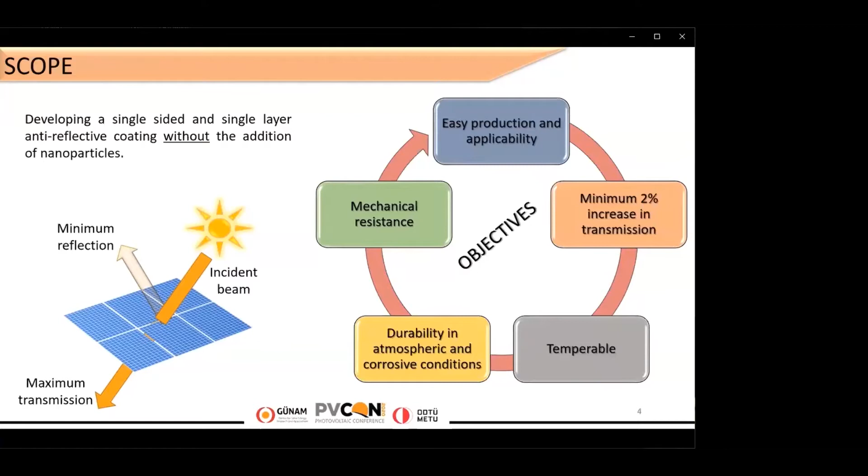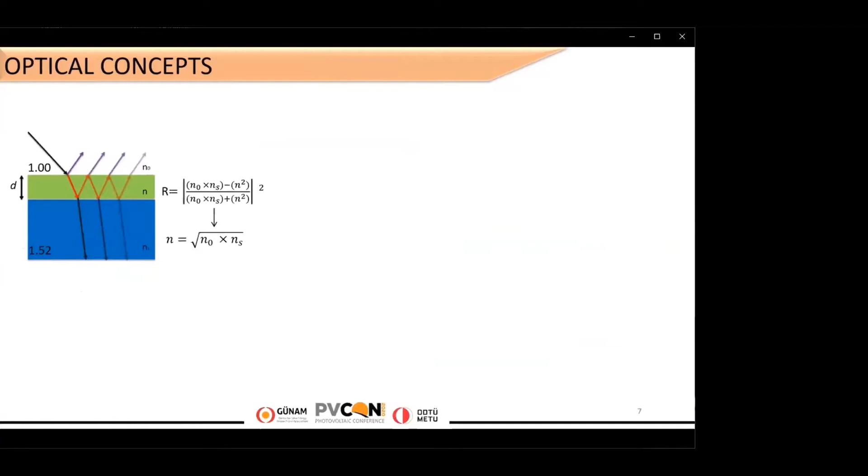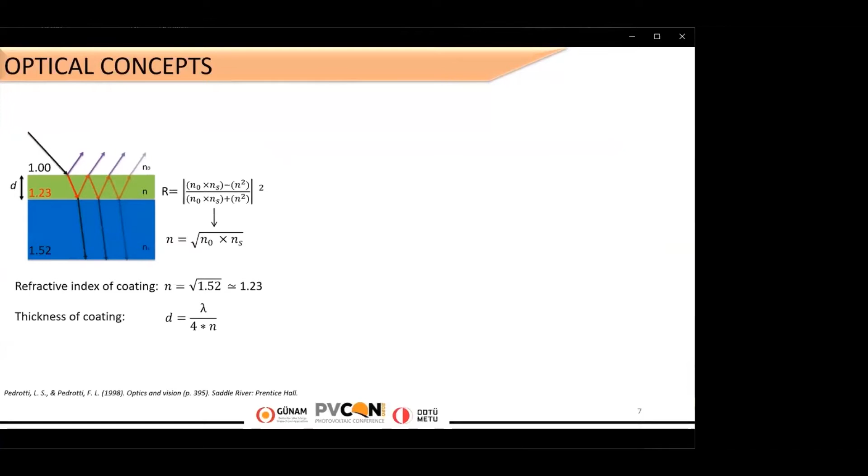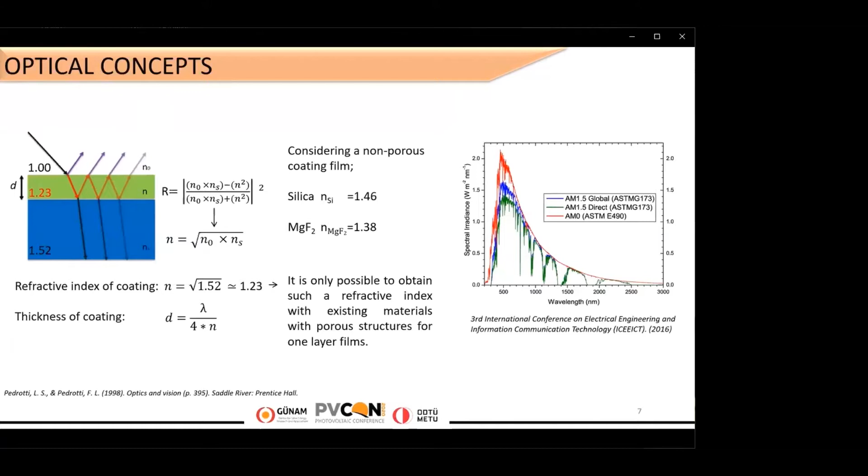Among the existing materials, there is no coating material with a refractive index of 1.23, so we have to obtain a porous film to decrease refractive index. Pore structures can be open or closed types. You can see on the table that there are advantages and some disadvantages compared to each other. We try to eliminate the low strength of the open structure by chemical modification. You can see a schematic view of molecules on the right corner of the page.

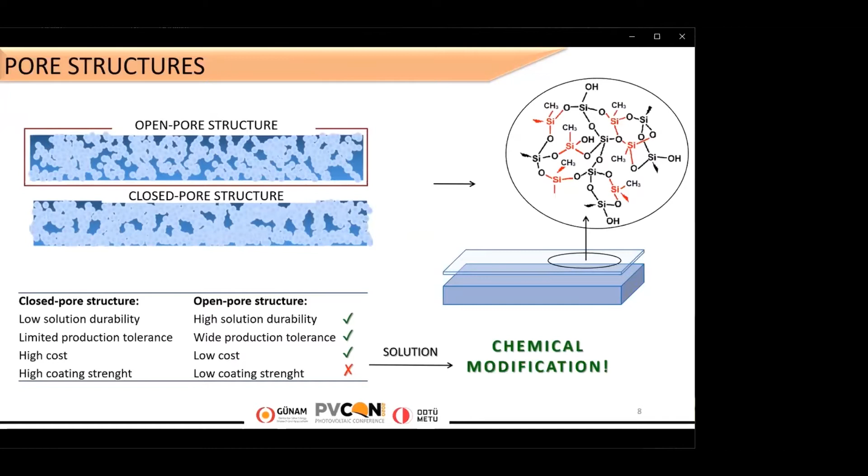There are two different types of silane molecules in the figure. Red ones have one organic group. During the process, these groups will decompose and small gaps will remain behind. This is the system that we studied.

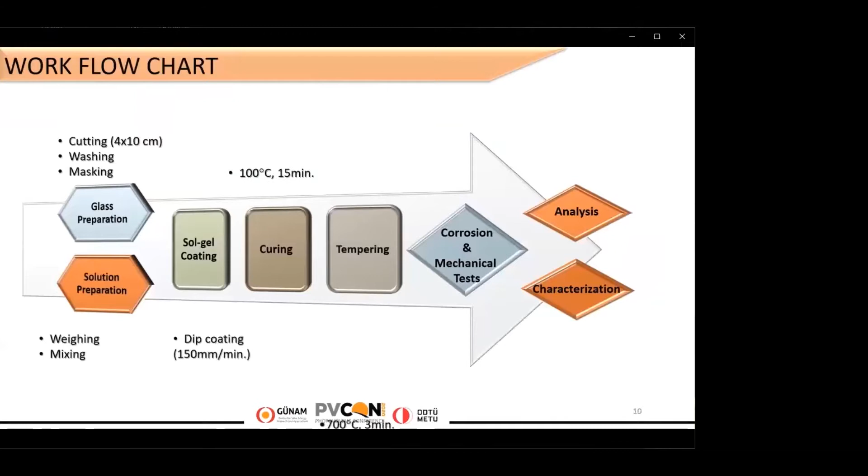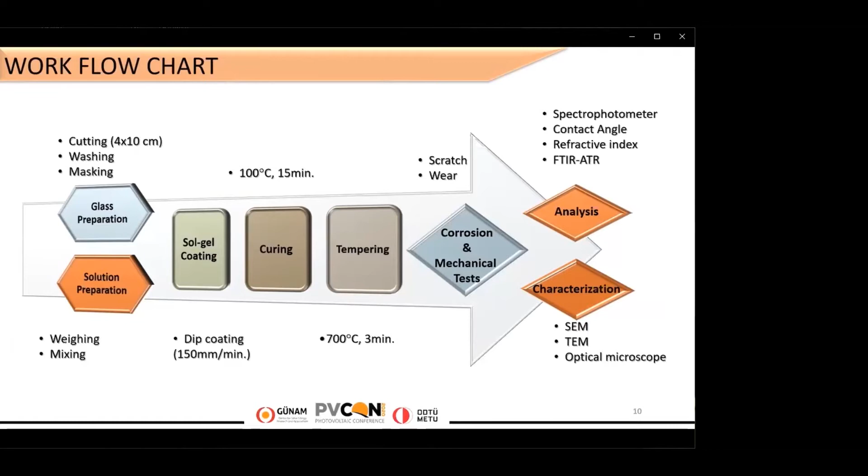Let's continue with experimental studies. First, glass substrates and solutions were prepared. Since we used the dip coating method, one side of the glasses was masked. After coating, coated glasses were cured at 100 degrees Celsius and tempered at 700 degrees Celsius for 3 minutes. In order to obtain optimum conditions, we studied all parameters such as withdrawal rate, temperature, and time, etc. Also, we did many tests, analyses, and used characterization techniques that you can see at the end of the flow chart to investigate details.

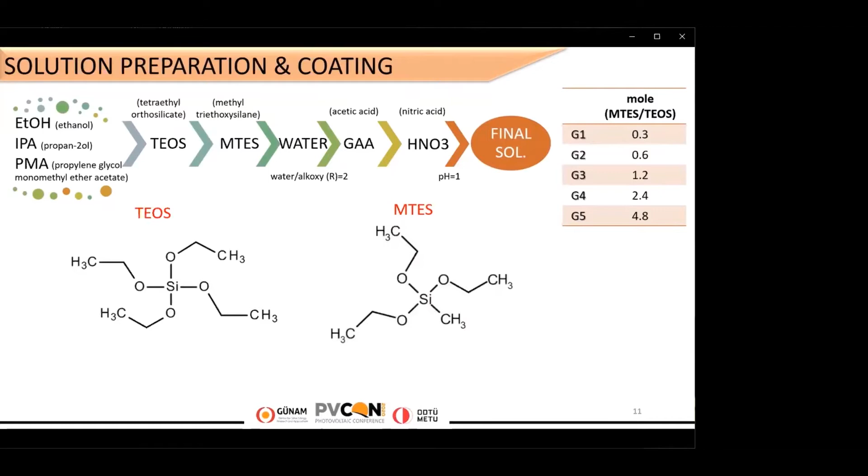Here is the solution preparation and coating steps. We used as a solvent an ethanol, propanol, and PMA mixture, and as a precursor, we used dual alkoxysilanes, which are tetraethyl orthosilicate and methyltriethoxysilane, that you can see in the figures. Finally, we added acetic acid as an organic acid and nitric acid as an inorganic acid together as catalysts. We determined the exact ratios of all ingredients by experimenting, except silanes. We have determined the silane groups as variables, and you can see 5 different ratios coded as G in the table. We use the dip coating method, as I said before, and here are the steps of this method.

The substrate is immersed into the solution. The substrate which has been dipped into the solution starts to be pulled up. The withdrawal is carried out at a constant rate. The film is deposited on the substrate while it's pulled up. The solvent is evaporated from the deposited liquid film, resulting in the coating.

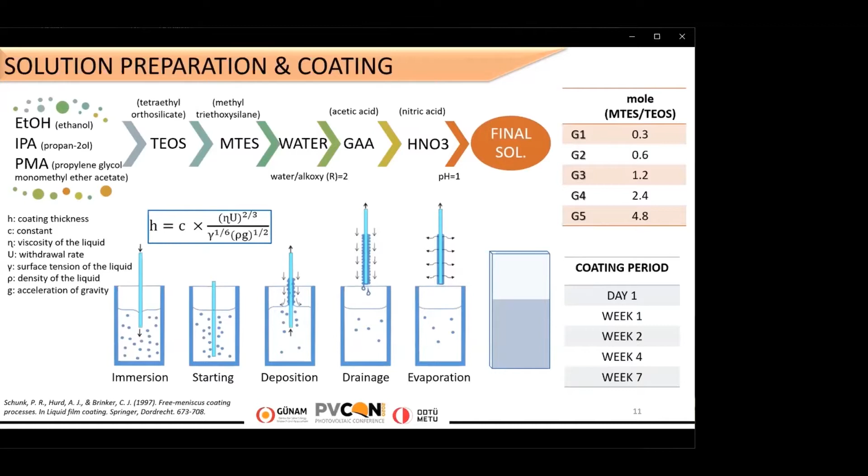The most important parameter is withdrawal speed, which you can see in the equation. The withdrawal speed determines the thickness of the deposited film. A higher speed produces a thicker film. As I mentioned before, our withdrawal rate was 150 millimeters per minute. With this method, we coated our samples with the periods you see in the table and examined the effects of the waiting time of the solution. Let's continue with results.

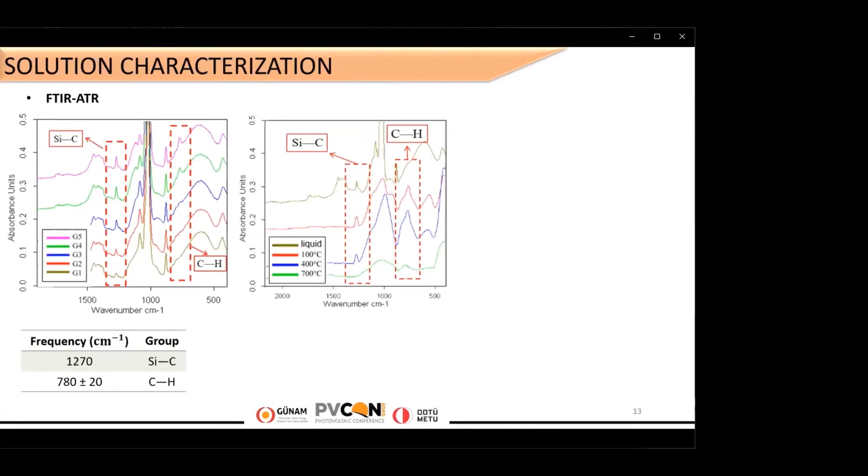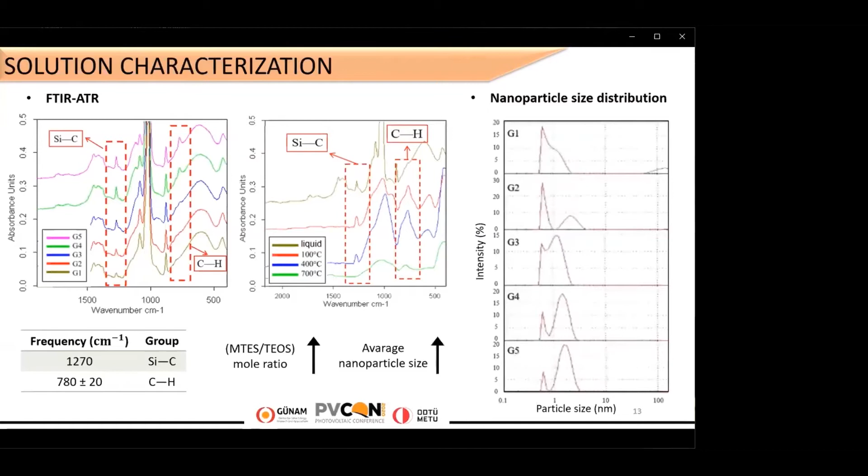There are two FTIR graphs here. The left one, which includes all versions, shows us the peaks belonging to organic groups are increasing with increasing MTES ratio, and the other one, which belongs to the G3 version of solutions after several temperatures, shows that organic groups moved away from solutions with increasing temperature. But even after 700 degrees, it is thought that there are still some organic groups left, as seen on the green line. Also, there are nanoparticle size distributions for all versions. We can say that the average nanoparticle size increases with increasing MTES ratio.

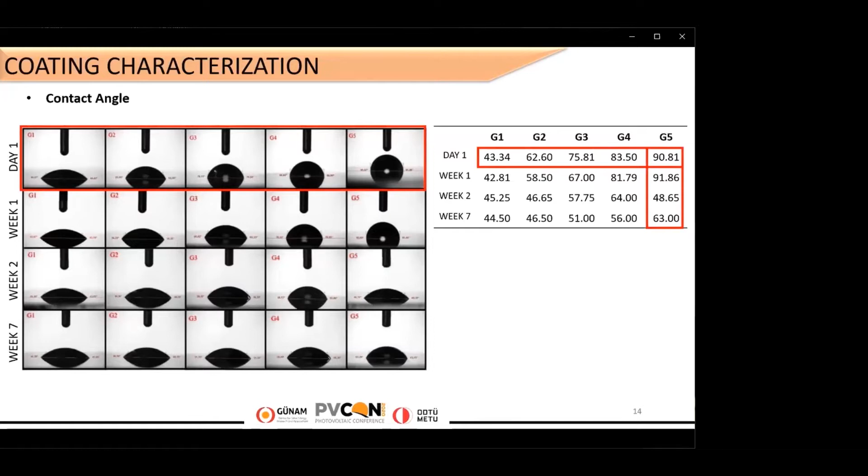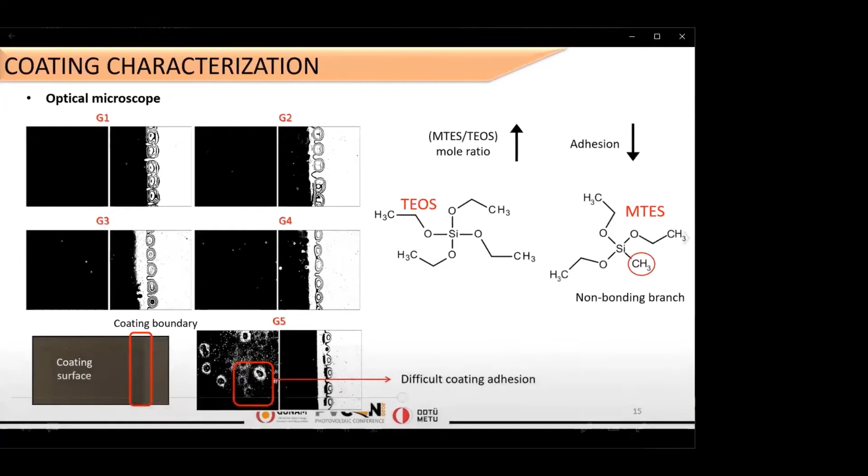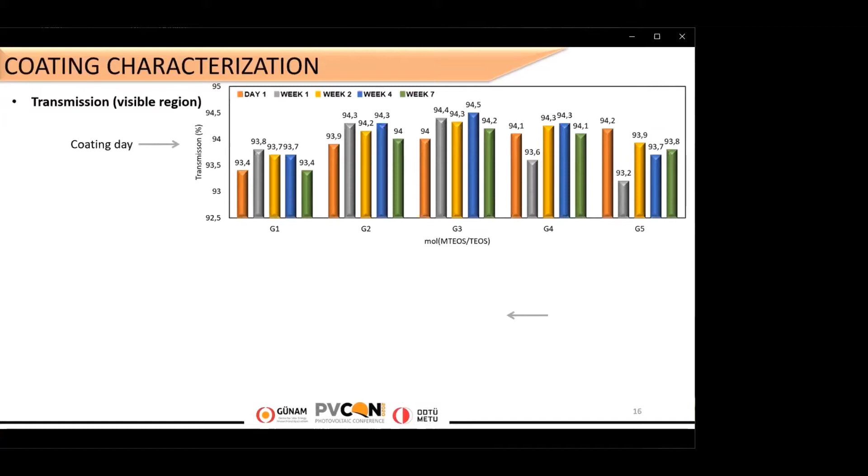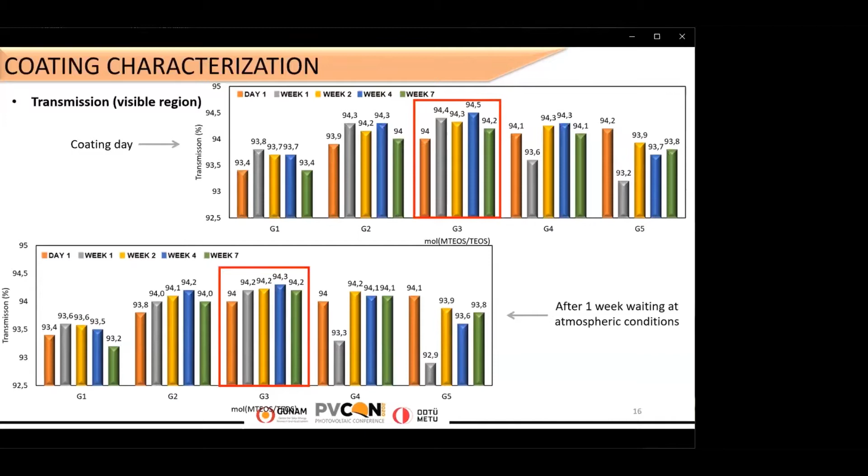In this part, there are other transmission and reflection measurements at different wavelengths. And again, the G3 sample has the best values in both transmission and reflection. The G3 coating provided 1.9% in AM 1.5 transmission scale, also provided 2.26% in light and 1.73% in solar reflection.

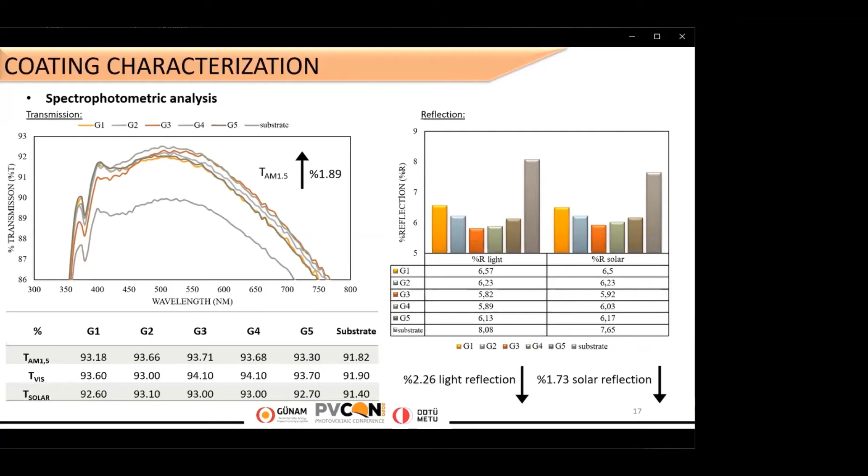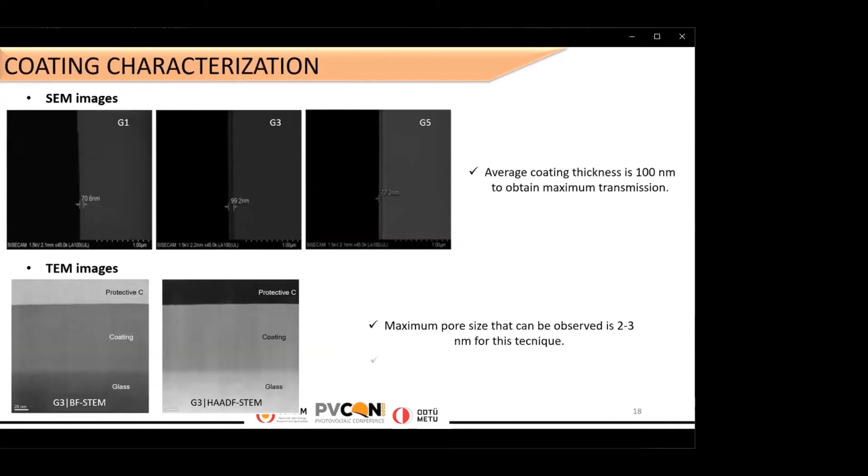Here are the cross-section SEM images of G1, G3, and G5 samples and TEM images of G3 samples. We have obtained the maximum transmission value with the G3 sample, and its coating thickness is about 100 nanometers. It's also shown in TEM images that G3 samples have no porosity at the nanometer scale.

You see a device here. The thickness and refractive index of coatings can be measured by this device. Actually, the device uses some equations to calculate this, with some approximate limits entered into its program. Then it generates data in reflection mode with the help of a probe and makes calculations by matching with the entered values. It seems that the values closest to 100 nanometers belong to the G3 sample, and the minimum refractive index value obtained is 1.40.

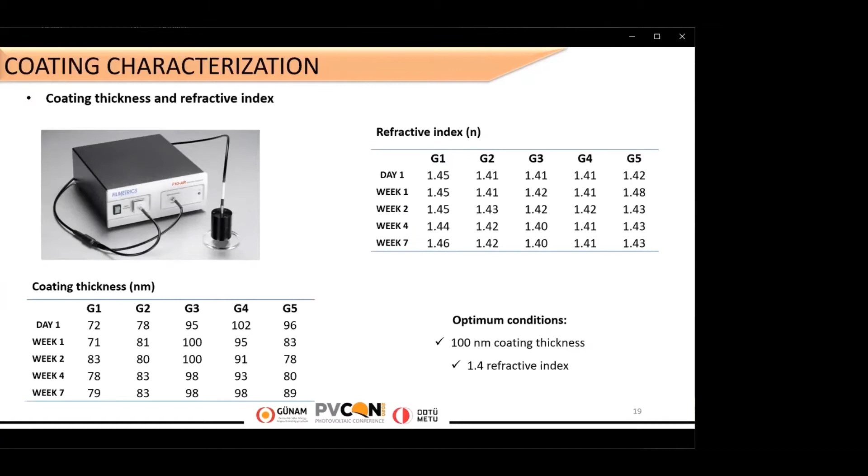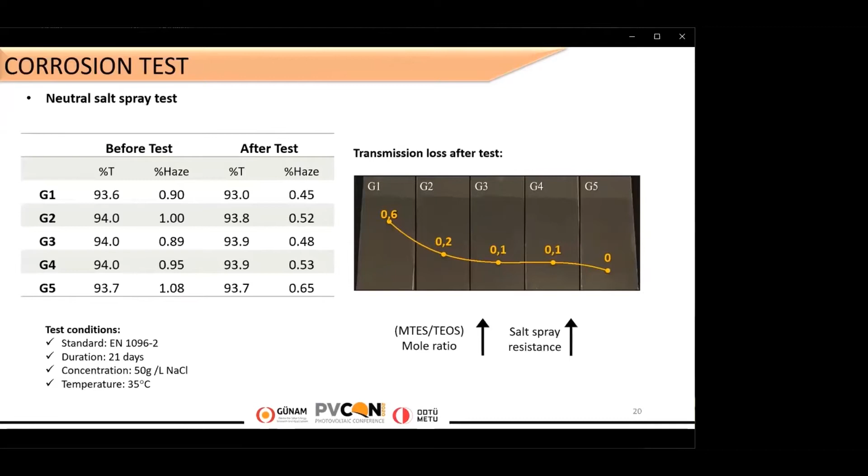Here are the results of the neutral salt spray test, which is one of the most important corrosion tests for coated glasses. When we compared all samples, it seems that the transmission loss, in other words, corrosion resistance, increases with increasing MTES ratio. We also did a linear wear test. The values in the table are a little bit different because the samples were masked for this test. The difference between measurements before and after the test is used to compare. It seems that there is no remarkable difference for all versions.

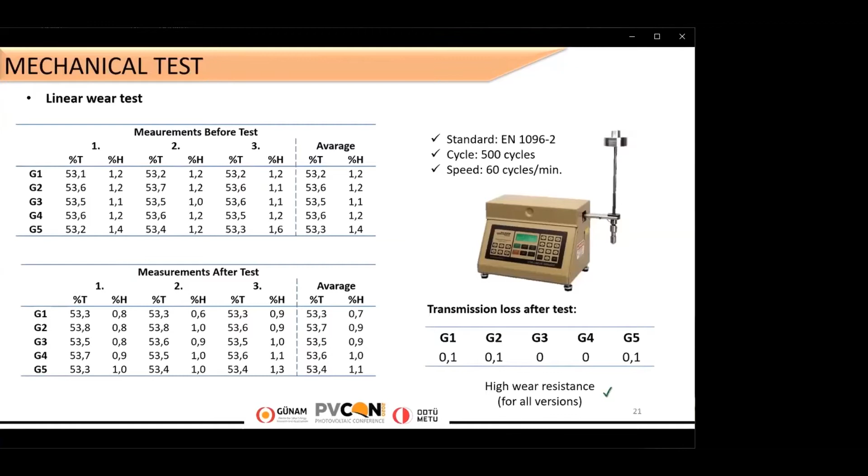Here's another mechanical test that is called the Newton scratch hardness test. You can see the scratches on the surface of coatings after the test in the figures. The columns represent versions of solutions and rows represent different loads. There don't seem to be any scratches in the G5 sample after 3 Newton loads. And when we look at the uncoated substrates after 20 Newton load, we can see scratches of glass as a black line. This type of scratch only appears in the G1 sample, not for the others. So we can say that the scratch resistance increases with increasing MTES ratio.

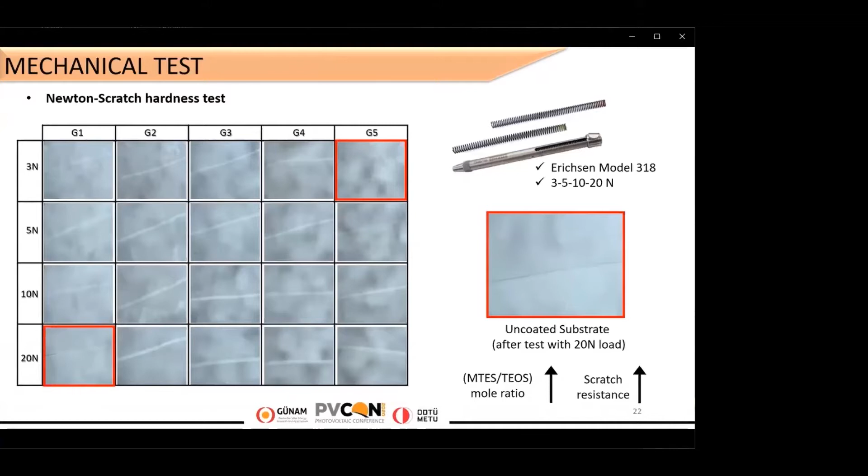We can summarize all results as follows. In this study, we obtained hybrid structures by using dual alkoxysilanes and different types of acids, and also we reduced the corrosive effects of solutions by using organic acids. It's important for mass production, such as roll coating.

Comparable anti-reflective coatings were obtained, and we saw that the MTES component provides coating thickness, tolerance, and elasticity, but its excessive increase affects coating adhesion and solution stability negatively. It's proved that the optimum MTES/TEOS mole ratio was 1.2 among all versions. Successful results were achieved from corrosion and mechanical tests for all versions.

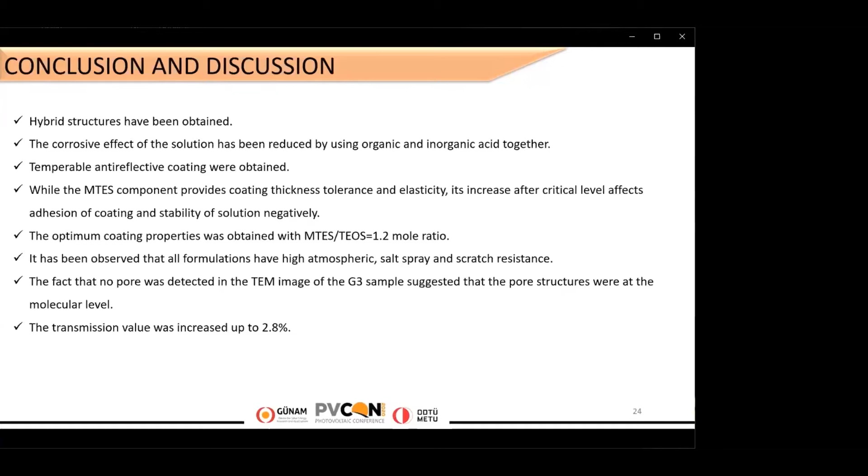There's one question from the audience that I want to direct to you. It says, how does the MTES ratio affect coating elasticity? Is it directly proportional? The MTES compounds include methyl groups, and most of these organic compounds decompose from the film structure at high temperatures. And in this way, small gaps remain behind in the structure.

These gaps provide the possibility of movement and flexibility of molecules during the heat treatments, and other inorganic branches are connected to each other and the glass substrate. On the other hand, if the MTES ratio is increased too much, the bonding branching numbers decrease, so the adhesion of the coating is affected badly. Okay, I think that was quite clear.

I have a small question. So it seems like these coatings that you have been developing have a positive effect on many parameters and performed quite well in many of your tests. But how about the cost effectiveness of this coating process? I mean, does that contribute too much cost to the overall preparation of the glass for solar cells?

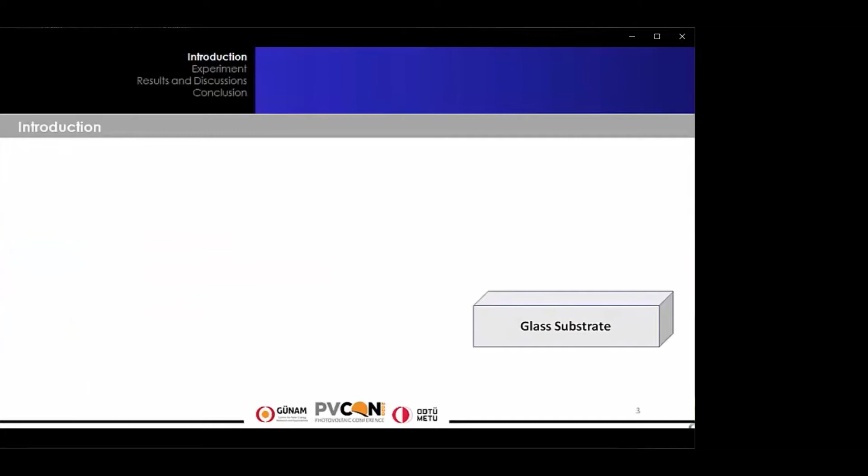In a photovoltaic device, the solar cell is composed of 4 main layers in addition to the substrate, which is generally made of glass. There is the back contact, which is an ohmic contact. In most cases, it's molybdenum. The second layer is the absorber layer with p-type conduction. The third is the buffer layer. And the last layer is the transparent conductive oxide layer in ITO or aluminum-doped ZnO.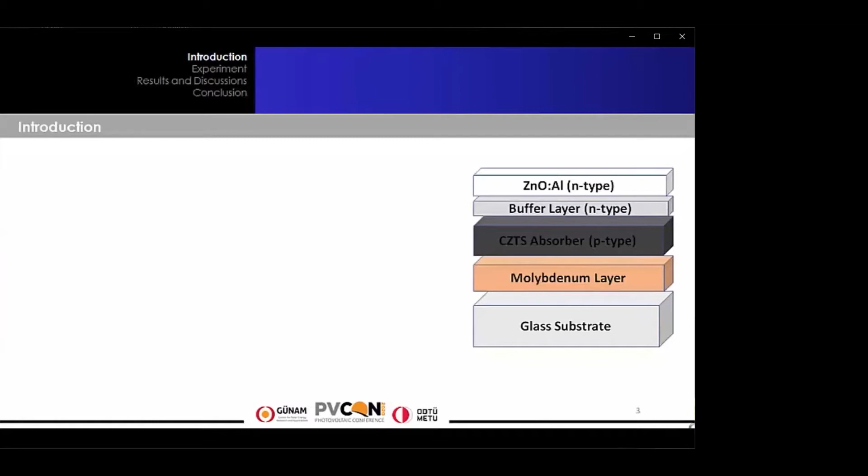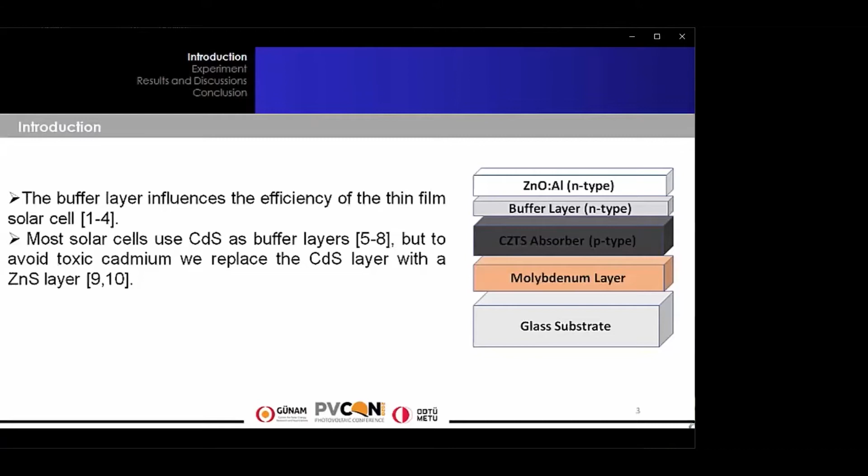In this presentation, we focus on the buffer layer, which is located between the absorber layer and the transparent conductive oxide layer. This layer considerably influences the performance of the thin film solar cell. Generally, most solar cells use CdS as buffer layers, but to avoid toxic cadmium, we replace the CdS layer with a ZnS layer. In this work, we were interested in the elaboration of zinc sulfide films and studied the effect of the solvent and temperature on the optical, morphological, and structural properties of our layers, which have been prepared by the mist CVD technique.

The spray-assisted CVD technique is a technique developed by Japanese researchers. The technique operates at atmospheric pressure and at room temperature. The figure in front of you shows the USCVD system.

In the USCVD system, there are three principal parts. The first is the gas unit. It's composed of a gas cylinder and a flow unit with two flow meters, one for carrier gas and the other for dilution gas. The second part of the system is the mist unit.

It consists of a hollow solution cylinder covered by a thin plastic film on the solution side and a small tank of water with two ultrasonic generators. The third part is the reaction unit. It's composed of a heater and reactor chamber.

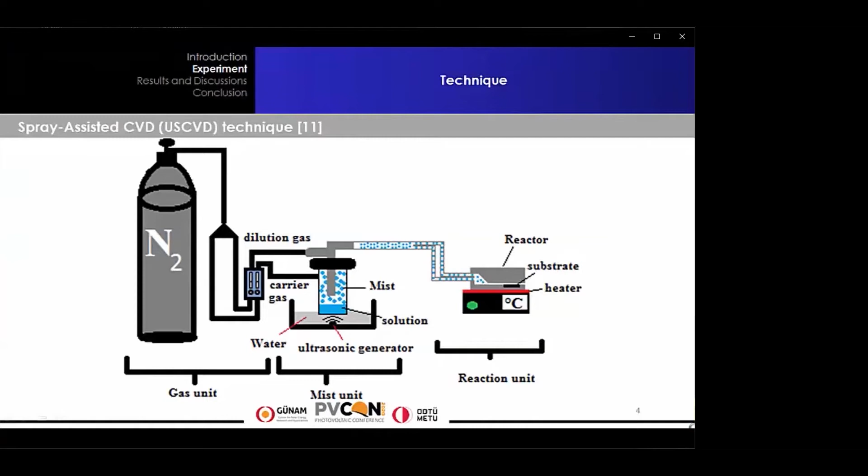This technique has many advantages, such as simplicity, low cost, no vacuum required at any stage, security and easy operation, the simple system configuration with easy maintenance, good adhesion between the film and the substrate, and the quality of the film.

First of all, the substrate is cleaned according to these steps. Wash 10 minutes in acetone bath. Wash 10 minutes in methanol bath. Rinse 10 minutes in distilled water bath. Dry the substrate using an oven at 110 degrees Celsius.

Then, ZnS solutions were prepared using zinc chloride as the zinc source and urea as the sulfur source. The required quantity of precursor was dissolved using distilled water or methanol or mixed distilled water and methanol in a glass beaker. After, our substrates are placed on the heating plates in the reactor at the desired temperature.

Then we initiate the USCVD parameters and we start the operation which is explained in the previous slide. The deposition time was 20 minutes. The used parameters are summarized in the table in front of you.

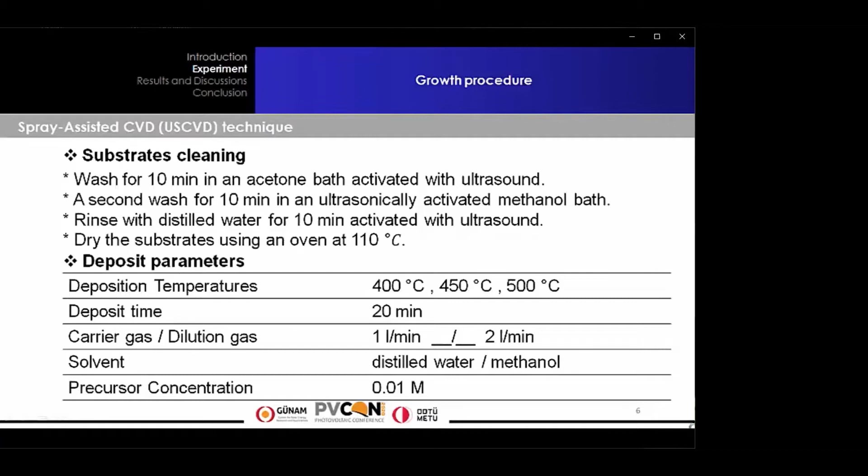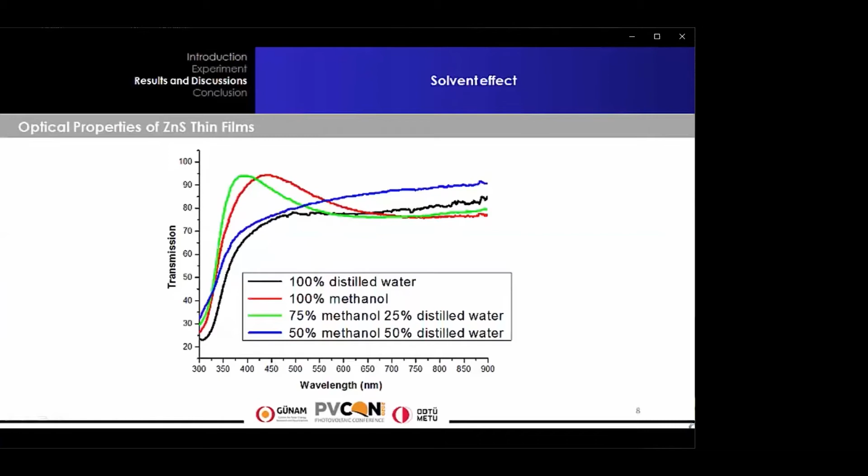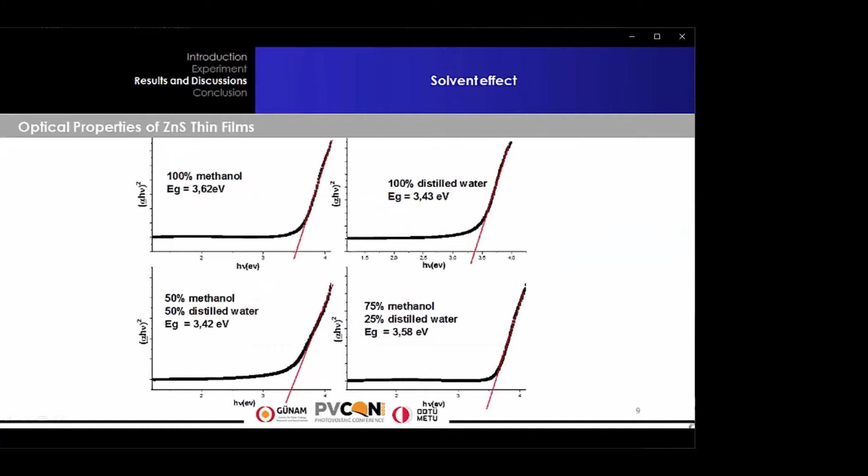From the transmission spectra, we have calculated the optical gap using the Tauc formula, and we can observe that the gap for all films varies in the range of 3.43 to 3.62 electronvolts. These values are close to the values reported in the literature.

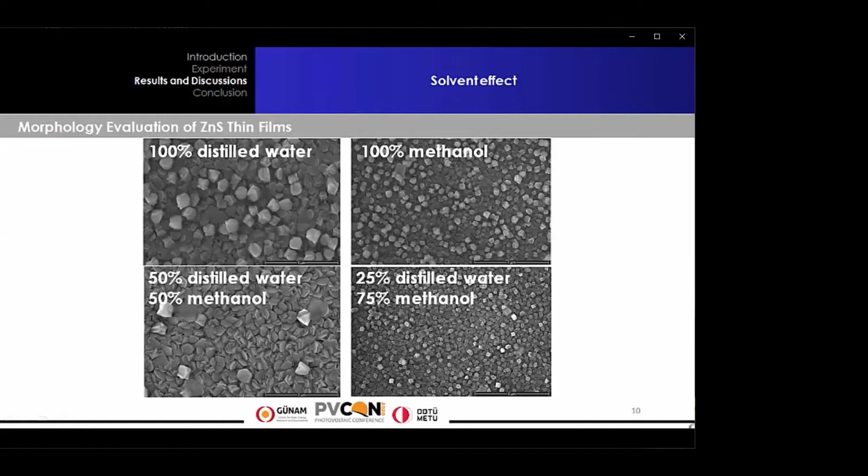These figures represent the morphology of ZnS layers deposited by USCVD with different percentages of the solvents. It is observed that all the films exhibit better adhesion to the substrate, very dense and very compact particles covering the entire surface of the substrate.

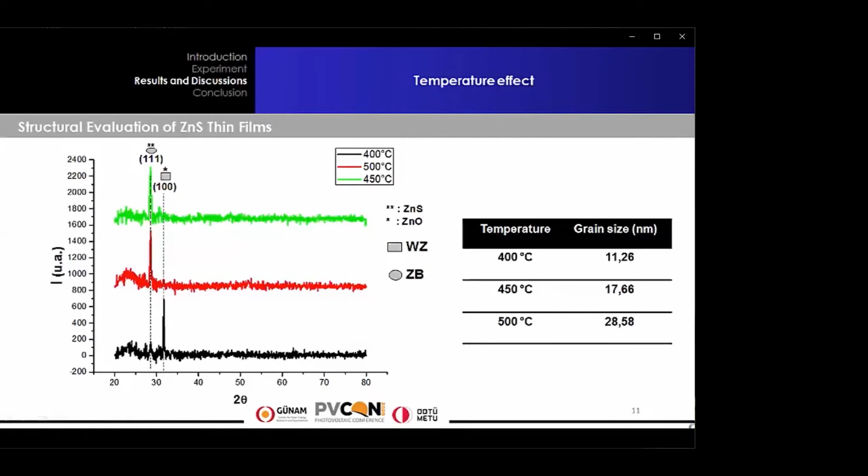These results indicate that all ZnS samples have a zinc blende structure and that the sample grown at 400 degrees Celsius also contains wurtzite ZnO structure. From the transmission spectra, we notice that the transparency of the film increases with the increase in the temperature of the substrate, and that the maximum of the transmittance is located in the visible range.

We have calculated the optical gap from the transmission spectra using the Tauc formula, and we observe that the gap of all films varies in the range of 3.57 to 3.65 electronvolts.

The figure in front of you represents the morphology of the layers of ZnS deposited by USCVD with different deposition temperatures. We can see that all the films exhibit better adhesion to the substrate, very dense and very compact particles covering the entire surface of the substrate.

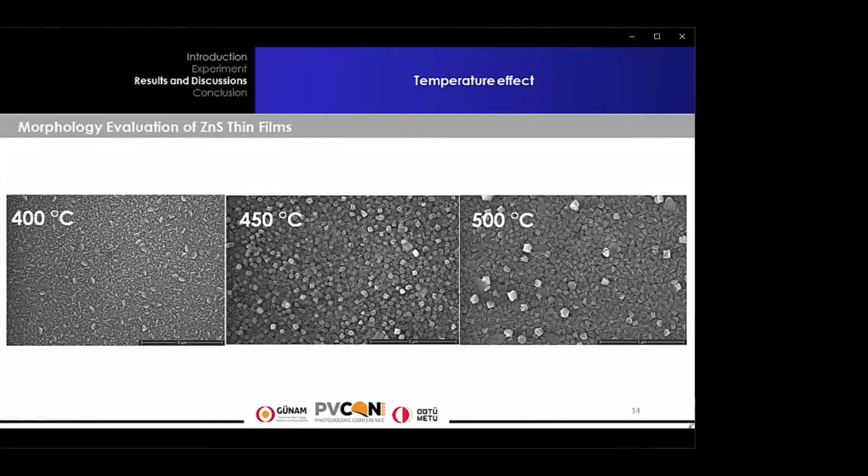The same images show the presence of a mixture of grains of hexagonal and cubic shape for the temperature 400 degrees Celsius, with a predominance of cubic grains toward the high temperature. These results confirm the analysis obtained by X-ray diffraction measurements.

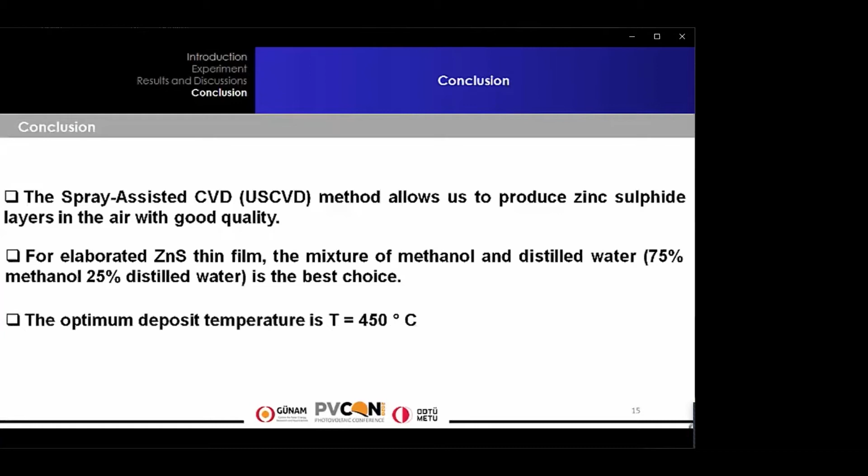Therefore, from the present study we can conclude that the spray-assisted CVD method allows us to produce zinc sulfide layers in the air with good quality. For elaborated ZnS thin film, the mixture of methanol and distilled water, 75% methanol, 25% distilled water, is the best choice. The optimum deposit temperature is 450 degrees Celsius.

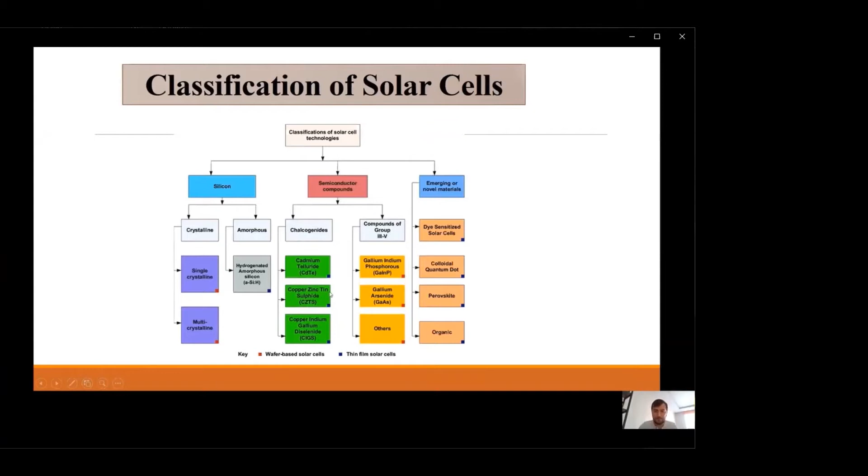What are the properties of the CZTS? First of all, we use the CZTS as an absorber layer in the CZTS-based solar cell. It has p-type conductivity, and we use it to absorb most of the photons. It has a suitable band gap. As you can see in this figure, 1.4 is around here, and the theoretical limit is about 30%. But for this kind of solar cells, the reported conversion efficiency is around 12.6%. So there are so many things to do to increase the reported conversion efficiency.

It has a high absorption coefficient. It means that you can absorb most of the light in a very thin layer. It has a low cost.

It has low cost and earth-abundant materials. As you can see, there's copper here, zinc here, tin here. It has a high crustal abundance, and the price is low compared with others like indium and gallium. So due to the low cost and earth-abundant materials, it is preferable in thin film photovoltaic applications.

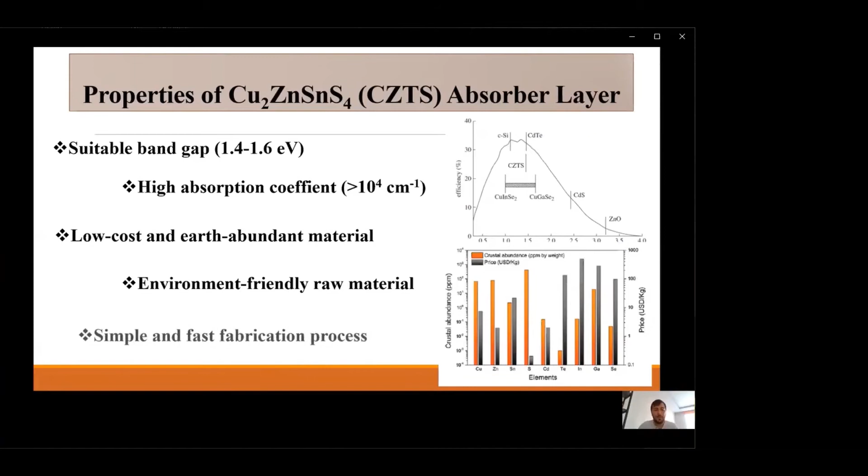It has environmentally friendly raw materials, so it can be used very widely in thin film solar cells due to these properties, and it also has a simple and fast fabrication process.

So in this study, we propose two new stacks, first proposed by our research group. The first one is copper tin zinc copper. First of all, we deposit copper and tin, and then we turn the sputtering chamber without breaking the vacuum, and obtain a copper tin alloy in order to prevent tin loss from the samples, because tin has a high vapor pressure. So to prevent the tin loss, we alloy it with copper, and then zinc is deposited on it. Finally, the remaining part of the copper is deposited on zinc.

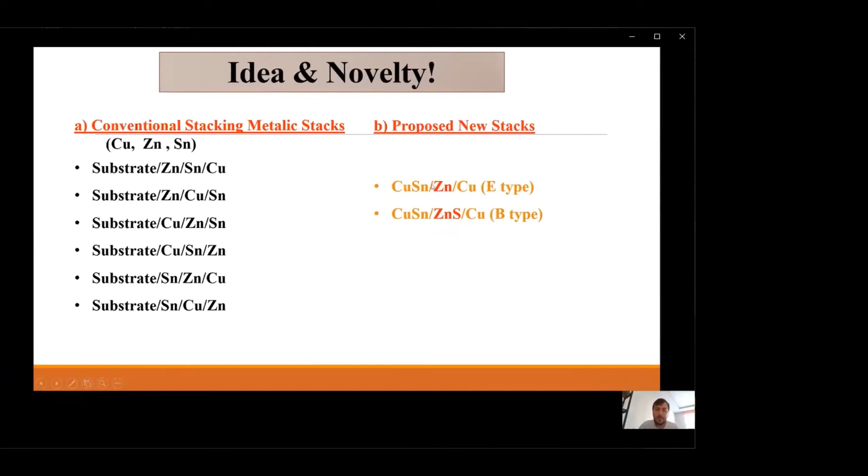We named this stack E-type because we used elemental zinc here, and in the next one we use a binary layer of zinc, so we used B-type. We denoted these samples as B-type because we used a binary target here. So in this study, we investigate the effect of the reaction temperature and stacking order of these films. We use various sulfurization temperatures and compare both stacking orders to find the best one.

What were the experimental details? We sputtered the metallic films layer by layer with a PVD system in our laboratory to form these two stacking orders, copper tin zinc copper and copper tin zinc sulfide copper. We annealed them in the RTP system at 500, 525, 550, 575 for 1 minute, because the RTP gives a nice facility with a heating rate of 3 Celsius per second in an argon and hydrogen atmosphere.

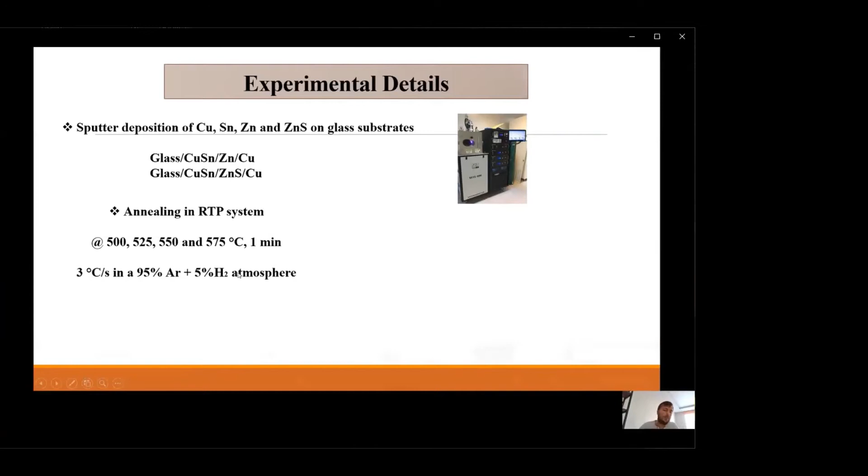And then finally, we analyze these samples with a profilometer to measure the thickness of the films, EDX to measure the chemical composition of the films, SEM, scanning electron microscopy, to investigate morphology of the films, XRD to investigate crystalline structure, and Raman also to investigate structural properties of the films. And finally, room temperature photoluminescence spectroscopy to investigate optical properties of these films.

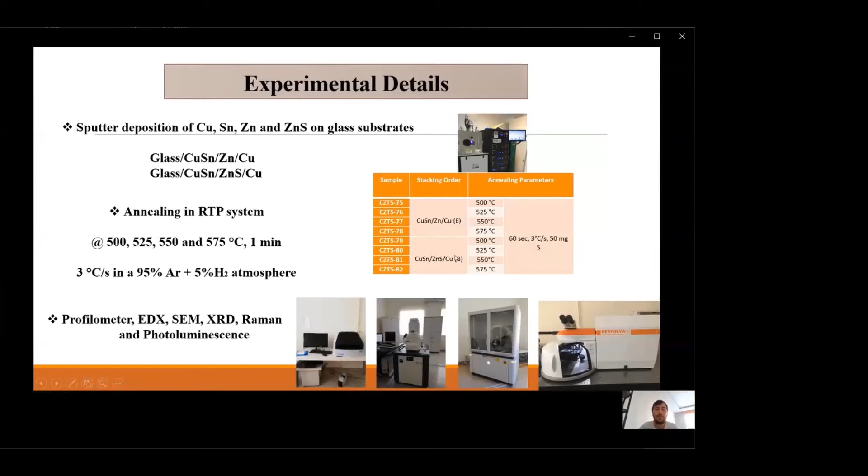As I said before, we use two stacking orders, E-type and B-type samples, and we use 4 different temperatures for each sample. So we numbered the samples like CZTS 75, 76, 77, 78 according to their sulfurization temperature for E-type, and CZTS 79, 80, 81, 82 for B-type samples according to their sulfurization temperatures.

In our EDX measurement, we target to obtain copper-poor and zinc-rich samples, because in CZTS thin films, the copper-poor and zinc-rich composition is a desired property, since copper vacancies and copper-zinc antisite defects strengthen the P-type conductivity of this compound. So this is our target. This is the chemical composition of the prepared CZTS samples, E-type on the left side and B-type on the right side.

As you can see, for the E-type samples, all of the samples have a copper-poor and zinc-rich composition. But at 500 Celsius, the copper ratio is less than the others, and the sulfur ratio is low compared to other samples. So it can be concluded that sulfurization for 1 minute at this temperature is maybe insufficient to obtain fully completed CZTS samples. So for E-type films, maybe 500 Celsius is not sufficient.

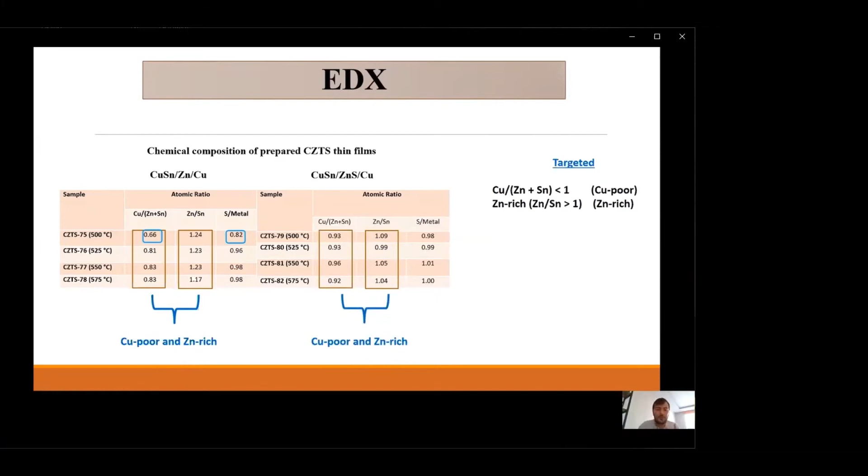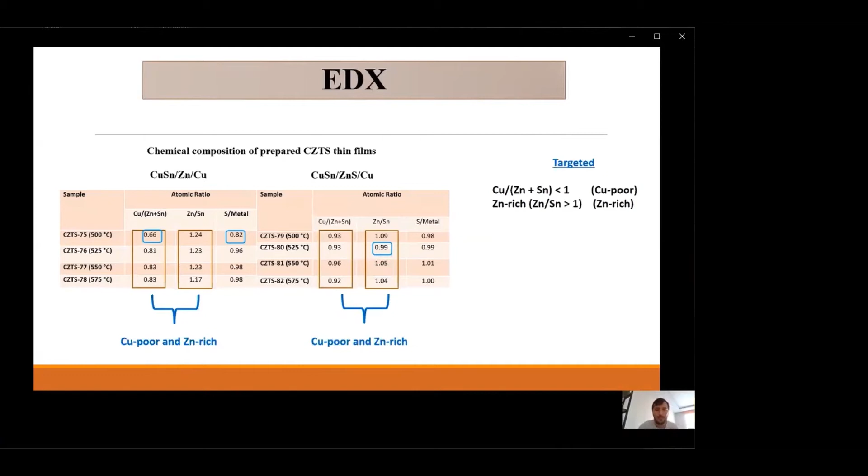And also for B-type samples, you can see all of the samples have a copper-poor and zinc-rich composition except this sample. In this sample, you can see the zinc ratio is the stoichiometric ratio. So maybe it can be excluded due to this composition.

The X-ray diffraction, we take it to examine the crystal structure of the films. As you can see, for the E-type and B-type samples, regardless of the sulfurization temperature or stacking orders, all of the samples are dominated by diffraction planes of the kesterite CZTS phase. As you can see, here's the 112 plane, 220 plane, and 312 plane. For both samples they dominate all the patterns.

Apart from the kesterite CZTS phase, as you can see, at low reaction temperatures, some copper-based secondary phases occurred, and also tin-based secondary phases like copper sulfide, tin disulfide, and Cu2S. But here I want to draw your attention: as you increase the temperature above 550, you can see some tin sulfide also appear again.

This is an important result since, according to Scragg and his colleagues, with increasing temperature these reactions are reversible. So if you increase the temperature above a certain temperature, some decomposition reaction can occur. So in these samples, maybe some decomposition reactions occur since the tin sulfide phase forms here.

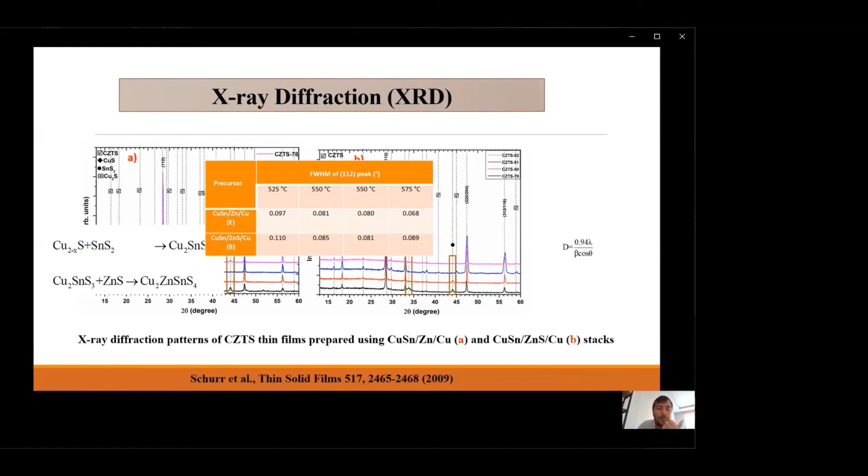For the B-type samples also, you can see the full width at half maximum decrease until 550, then the full width at half maximum increases. It means that for B-type samples, 550 Celsius seems much better. For E-type samples also, we can make a conclusion, because after 550, some decomposition reactions are also observed. So for E-type samples also, 550 seems the proper one in terms of pure crystalline quality.

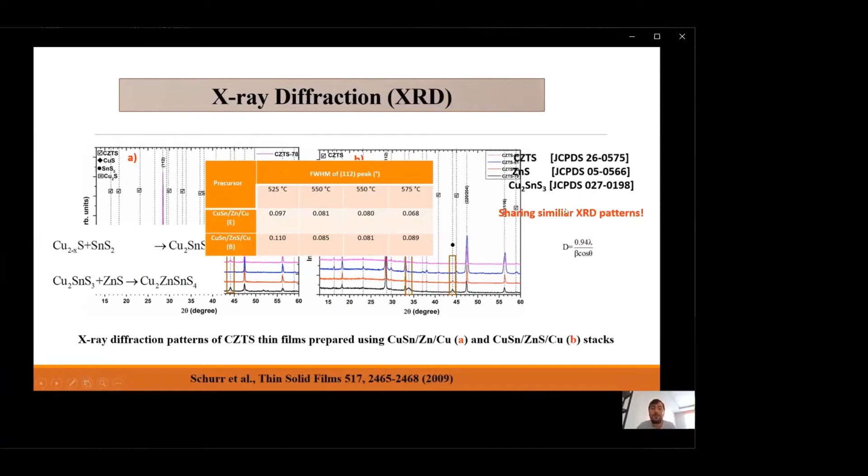But of course, XRD is not enough for distinguishing the CZTS phase, because CZTS, zinc sulfide, and CTS thin films share similar XRD patterns. So we need a complementary technique. This is the Raman spectroscopy. As you can see, the Raman spectroscopy gives us the phases and distinguishes these phases from each other.

As you can see, regardless of the sulfurization temperature and the stacking order, all the samples are again dominated by peaks of CZTS. As you can see, around 338, it stems from the vibration of sulfur anions in this compound. Apart from this kesterite phase, you can see at low reaction temperature some copper sulfide phase occurs, and at high reaction temperature some CTS phase occurs.

According again to this formula, you can see the copper tin sulfide phase occurs in these samples. It means that for E-type samples, maybe the sulfurization temperature is not enough. So maybe we should extend the sulfurization time to obtain a fully CZTS structure.

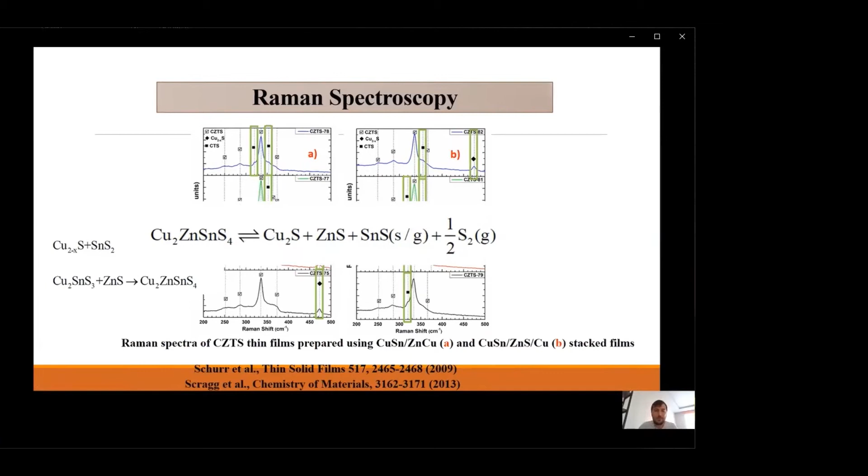In the B-type CZTS samples, you can see copper sulfide is not observed, but the CTS phase occurs in all samples. Apart from these, in the samples at 575, you can see additionally a copper sulfide phase. According to Scragg et al., formation of copper sulfide may signal the decomposition reaction in CZTS compounds. So 550 maybe is much better, or maybe you should limit the temperature at this temperature.

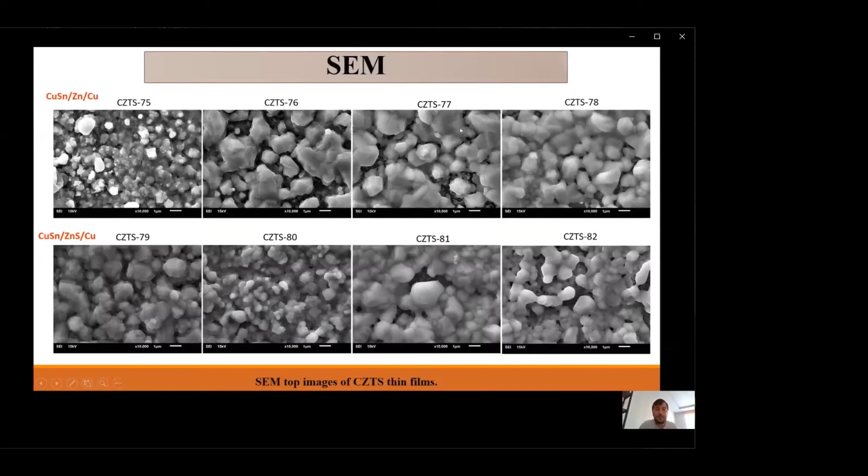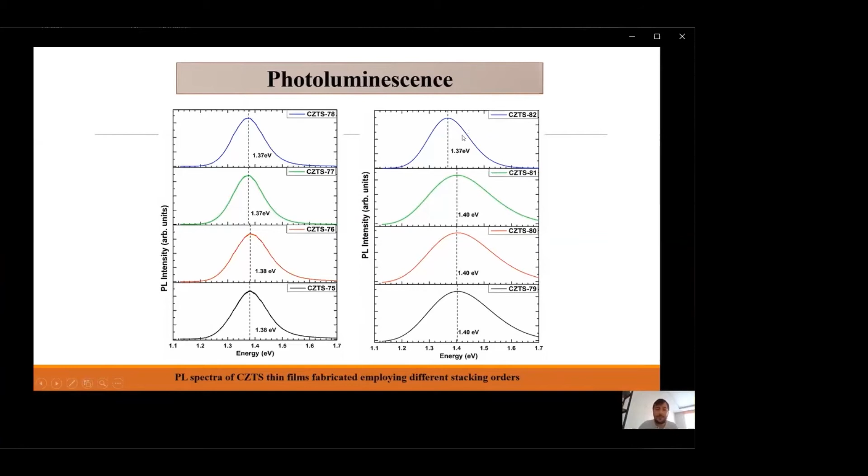Here also you can see in the B-type samples they are close to band gap values of the CZTS samples, except for this sample. So in this sample we also observed maybe some impurities and defects in the band structure.

Our conclusion: it can be seen that CZTS thin films were successfully prepared by a two-stage process using two stacking orders and different reaction temperatures. Most of the films have a copper-poor and zinc-rich composition, but it was seen that the reaction temperature has a significant impact on the chemical composition.

XRD patterns displayed the diffraction planes of the CZTS regardless of the stacking order and sulfurization temperature, and additionally some copper and tin-based secondary phases were observed in some films. Formation of the kesterite CZTS phase was confirmed by Raman spectroscopy, and also the existence of a CTS phase was distinguished for some CZTS films. Dense and polycrystalline surface microstructure was observed in SEM images.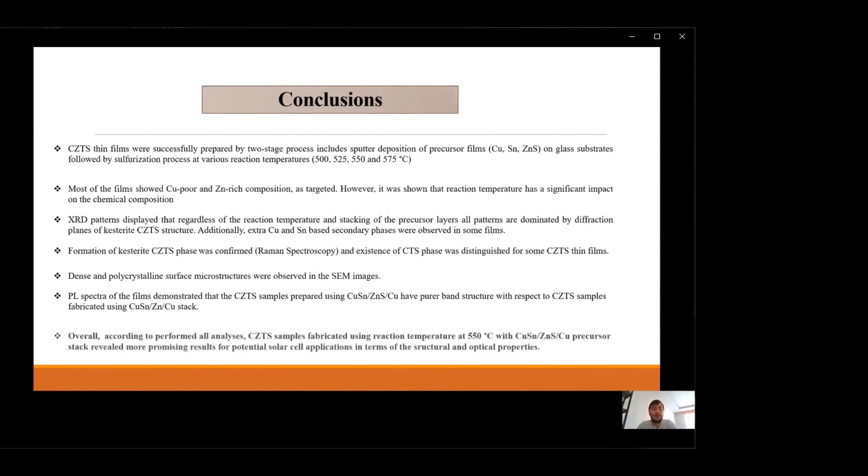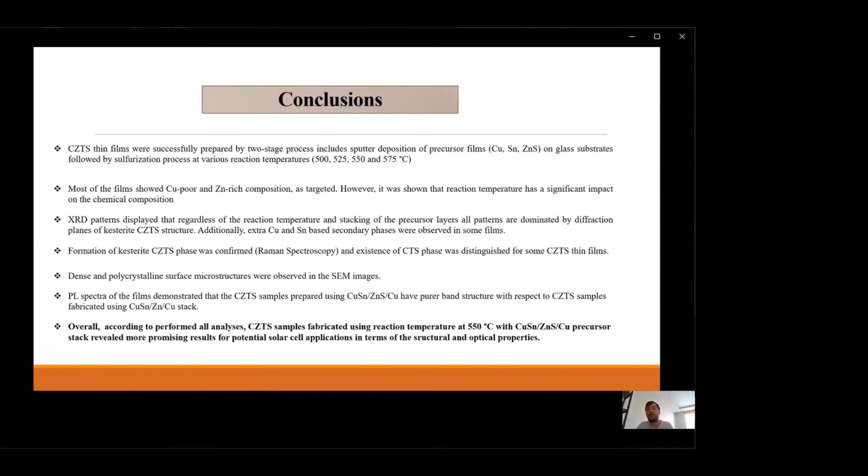PL spectra of the films demonstrated that the CZTS samples prepared using CuSn/ZnS/Cu have a purer band structure with respect to other samples. Overall, according to the performed analysis, CZTS samples fabricated using a reaction temperature of 550 with the copper/tin/zinc sulfide/copper precursor stack revealed more promising results for potential solar cell application in terms of the structural and optical properties.

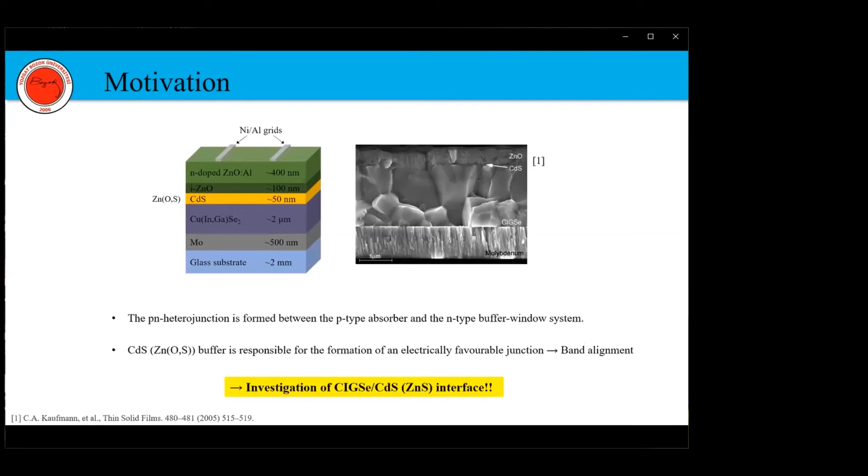In addition, it is well known that alkali metals play a crucial role in CIGS-based thin film solar cells. In 2013, a record efficiency of around 20% was obtained using potassium fluoride post-deposition treatment, whereas in 2016, even a higher efficiency of more than 22% was achieved using rubidium fluoride post-deposition treatment. Therefore, our second motivation is to investigate the impact of rubidium fluoride post-deposition treatment on the CIGS/cadmium sulfide interface.

A recent record efficiency of more than 23% has been obtained by the application of cesium fluoride post-deposition treatment on the CIGS absorber and using an alternative zinc-based buffer layer. Therefore, in this work, we aim to also compare CIGS/cadmium sulfide and CIGS/zinc sulfide interfaces.

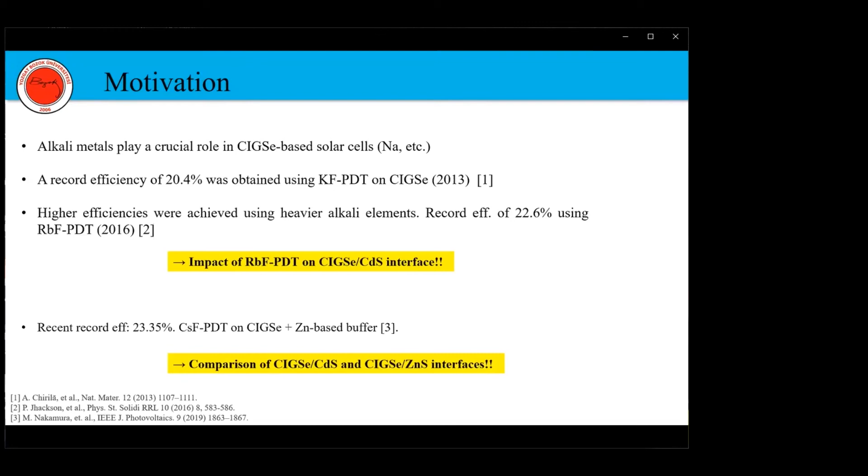The experimental method we used in this work is hard X-ray photoelectron spectroscopy, HAXPES. If we look at the universal curve of the inelastic mean free path, kinetic energies between 10 and 1000 electron volts correspond to an inelastic mean free path of about 2 nanometers. These energies can be achieved using standard lab-based X-ray sources like magnesium K-alpha and aluminum K-alpha.

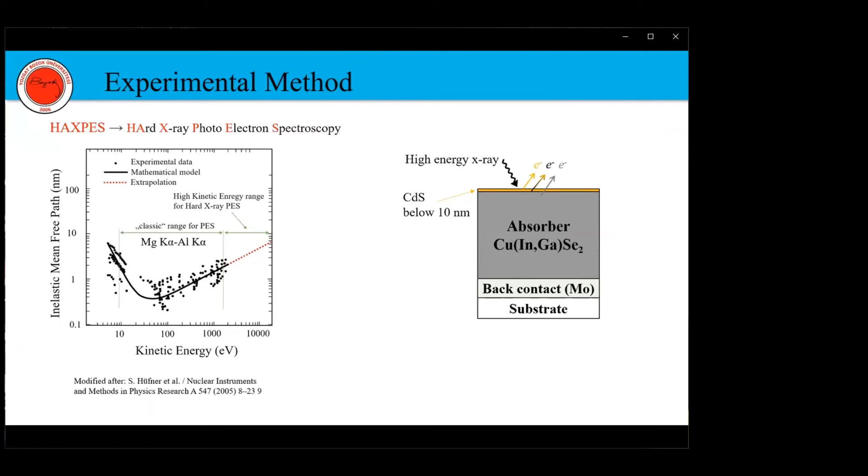If we somehow increase the kinetic energy of the photoelectrons, we can correspondingly increase the inelastic mean free path up to 10 nanometers. So using high energy X-rays, we can investigate the absorber/buffer interface if we could have a buffer layer with a thickness of below 10 nanometers. High energy X-rays can be obtained in synchrotrons.

The HAXPES measurements in this work were performed at the BESSY II electron storage ring located in Berlin. In BESSY II, there are several beamlines available for various purposes. We performed our measurements at the HiKE end station, which is located at the KMC-1 beamline. The advantage of using this end station is that we can tune the X-ray energy between 2 and 12 kiloelectron volts. This provides us a non-destructive investigation of the corresponding interfaces.

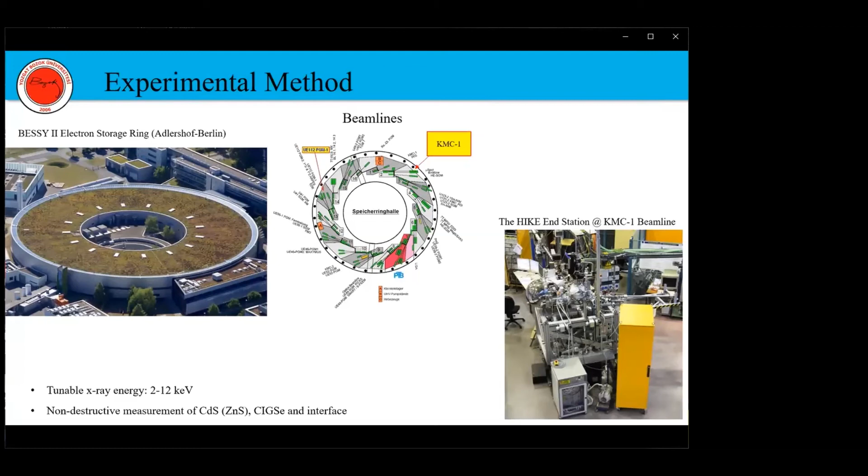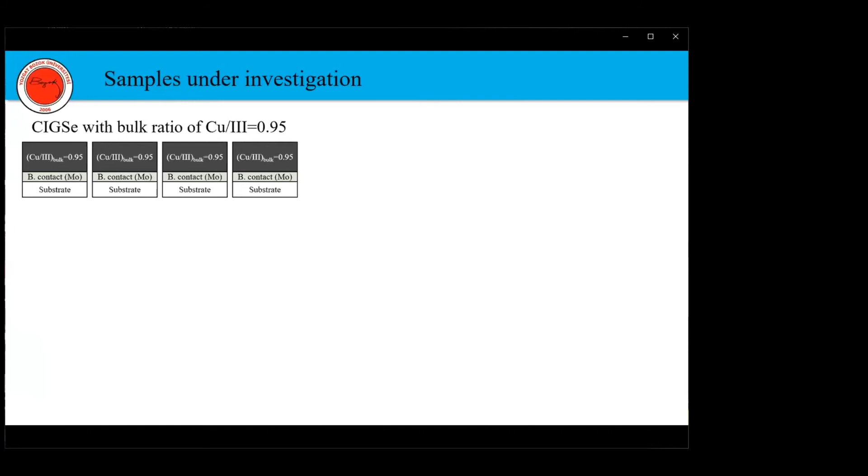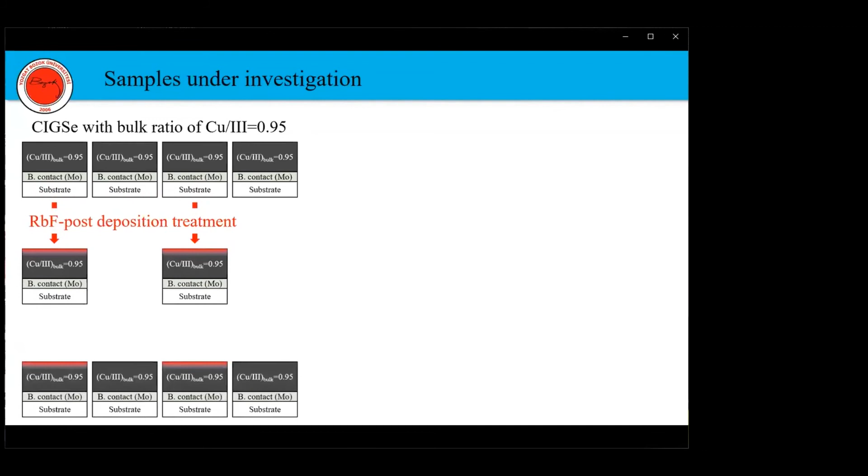Now, I would like to briefly present the samples under investigation. First, CIGS absorber films are deposited onto molybdenum-coated glass substrates using a three-stage co-evaporation process. The bulk copper to indium plus gallium ratio was adjusted to 0.95. Rubidium fluoride post-deposition treatment was applied onto 2 samples, whereas the other 2 were kept untreated.

Then cadmium sulfide and zinc sulfide buffer layers were deposited onto treated and non-treated absorbers using chemical bath deposition. The treated and non-treated samples were dipped into the same bath of either cadmium sulfide or zinc sulfide. In order to observe the role of the absorber composition, we prepared a similar set of samples with a copper to indium plus gallium ratio of 0.8.

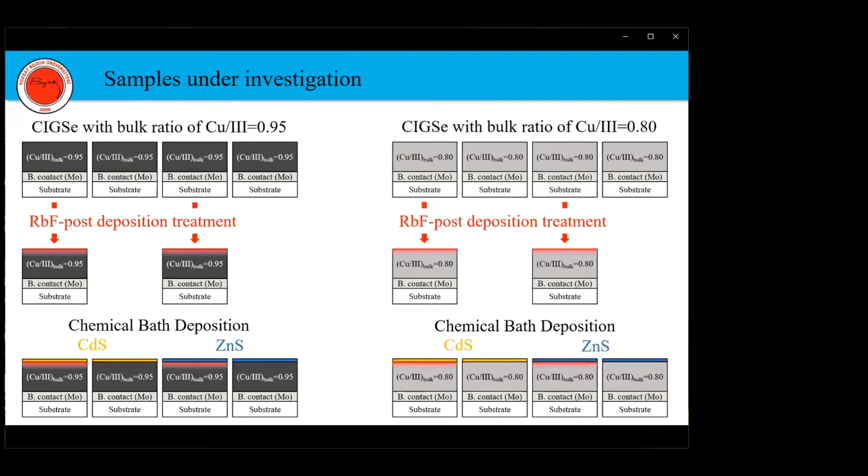Now, I will briefly discuss the impact of rubidium fluoride post-deposition treatment on CIGS/cadmium sulfide and CIGS/zinc sulfide interfaces. In order to have depth-dependent information, we performed HAXPES measurements using X-rays with energies of 2030, 3000, 4000, 5000, and 6000 electron volts. The survey spectra of all the samples are plotted in the same graph here for an overview. The spectra are recorded with 3000 electron volt excitation energy.

On all the graphs, we can see either cadmium or zinc and sulfur-related peaks originating from the top layer: cadmium 3d, zinc 2p, and sulfur 1s. At the same time, absorber-related peaks, namely copper 2p, indium 3d, gallium 2p, and selenium 2p core levels are also visible. Therefore, we can simply say that the information depth includes the interface region. So we can say that the analysis of the interface region is possible.

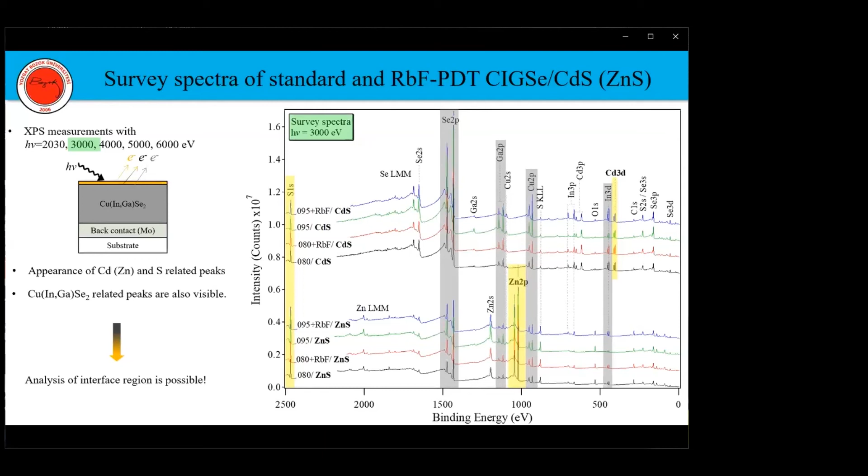In order to get quantitative information, we recorded the detailed core level spectra of all the constituent elements. We then integrated them over a Shirley background using a Voigt profile, which is a convolution of a Gaussian and a Lorentzian profile. The signal intensity of an individual peak is then calculated as the area of the Voigt profile, the blue area here. The intensity of an individual peak is related to many factors. Therefore, it has to be normalized to these factors before any comparison between two different peaks.

The normalization factors are listed here. C is the concentration of the corresponding element. N is the number of scans. I0 is the incoming beam flux. Sigma, the partial subshell photoionization cross-section. T is the transmission function of the photoelectron spectrometer. And finally, lambda is the inelastic mean free path of the photoelectrons.

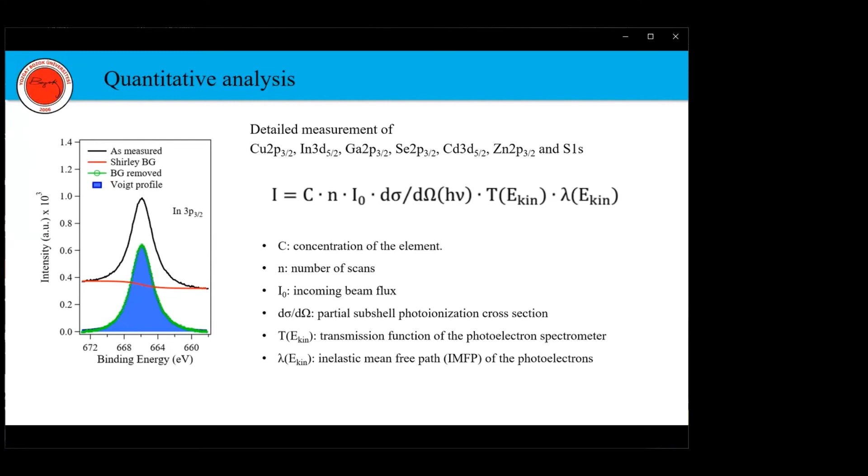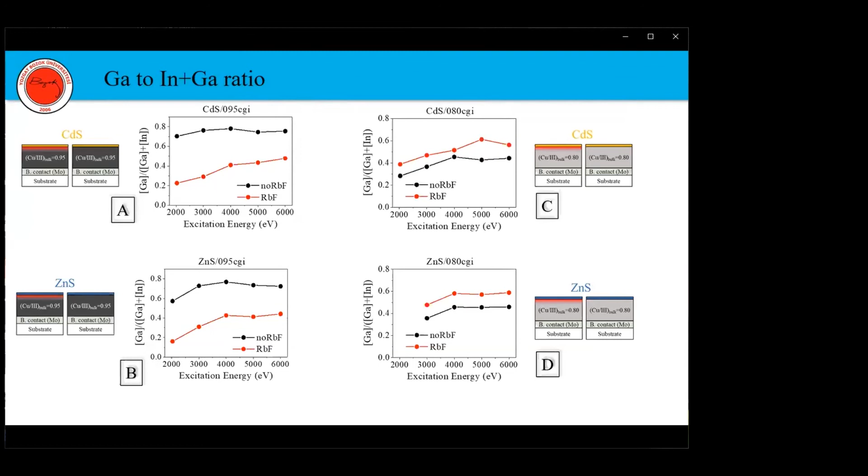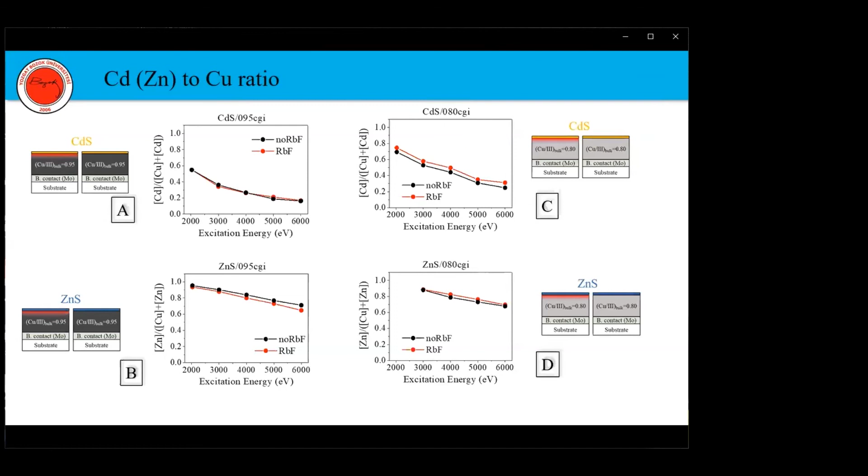With this, I would like to summarize our findings. We found a strong relation between cadmium diffusion and copper vacancy. We found that rubidium fluoride post-deposition treatment leads to an increased cadmium diffusion in case of relatively copper-poor sample. The copper-rich sample is not affected by RbF PDT in terms of cadmium diffusion.

We found that the variation in gallium to indium plus gallium ratio distribution can be dominantly attributed to the rubidium fluoride post-deposition treatment, but not the type of the buffer layer material. Finally, we found that zinc incorporation into copper vacancies to form donor-like zinc copper plus states does not occur as much as cadmium copper plus states.